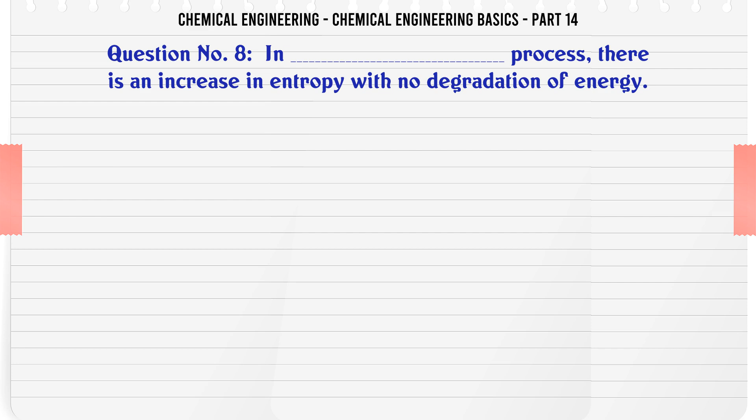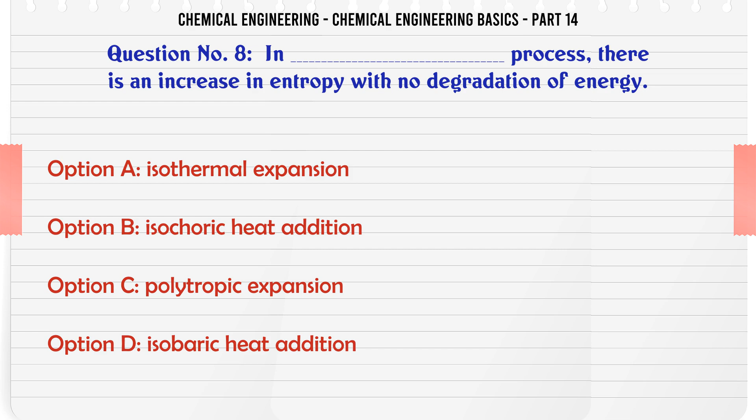In process there is an increase in entropy with no degradation of energy. A. isothermal expansion, B. isochoric heat addition, C. polytropic expansion, D. isobaric heat addition. The correct answer is isothermal expansion.

Which of the following is categorized as the plastic welding? A. gas welding, B. electric arc welding, C. forge welding, D. none of these. The correct answer is forge welding.

In spite of large heat transfer coefficients in boiling liquids, fins are used advantageously where the entire surface is exposed to boiling. A. film, B. nucleate, C. transition, D. all modes of. The correct answer is all modes of.

When water is sprayed on air passing through an insulated chamber maintained at a temperature higher than the dew point of entering air but lower than its dry bulb temperature, then the air is A. cooled and dehumidified, B. heated and humidified, C. cooled and humidified, D. heated and dehumidified. The correct answer is cooled and humidified.

The hardness of the lathe bed material is measured by the A. Shore scleroscope, B. Brinell hardness tester, C. Vickers hardness tester, D. Rockwell hardness tester. The correct answer is Shore scleroscope.

Radar is A. acronym for radio detection and ranging, B. name of technique for locating distant objects, C. name of instrument for locating distant objects, D. all ABC. The correct answer is all ABC.

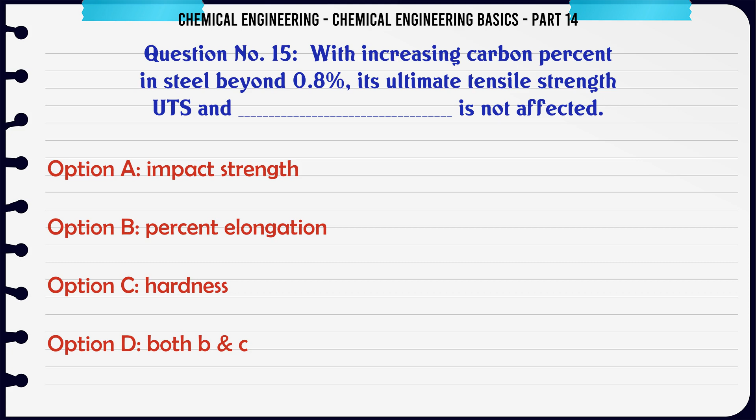With increasing carbon percent in steel beyond 0.8, its ultimate tensile strength is not affected. A. impact strength, B. percent elongation, C. hardness, D. both BC. The correct answer is impact strength.

Pick out the correct statement. A. A base is always soluble in water. B. Hydrogen is released whenever a metal reacts with an acid. C. Sodium hydroxide is both a base and an alkali. D. All indicators give red solution with an acid. The correct answer is sodium hydroxide is both a base and an alkali.

Aging of steel refers to the A. Degradation of steel by corrosion. B. Failure of steel structure by overstressing. C. Return of sharp yield point in temper rolled low carbon sheet after a period of time. D. Decarburisation of steel by overheating. The correct answer is return of sharp yield point in temper rolled low carbon sheet after a period of time.

When dry bulb temperature and wet bulb temperature of moist air is the same, it means that the A. Partial pressure of water vapor is less than the total pressure. B. Humidity is 100, dew point temperature of air has not reached. C. Dew point temperature of air has not reached, air is not saturated fully. D. Air is fully saturated. The correct answer is air is fully saturated.

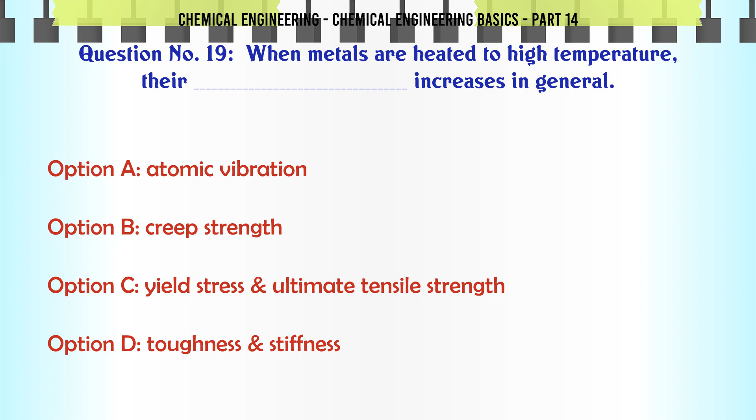When metals are heated to high temperature, their increases in general A. Atomic vibration. B. Creep strength. C. Yield stress, ultimate tensile strength. D. Toughness, stiffness. The correct answer is atomic vibration.

A friction lighter is normally used for lighting gas welding torch because of the reason that A. Its initial cost is very low. B. Duration of spark created is very small. C. Safety of welder is ensured. D. It is easier to operate and maintain. The correct answer is safety of welder is ensured.

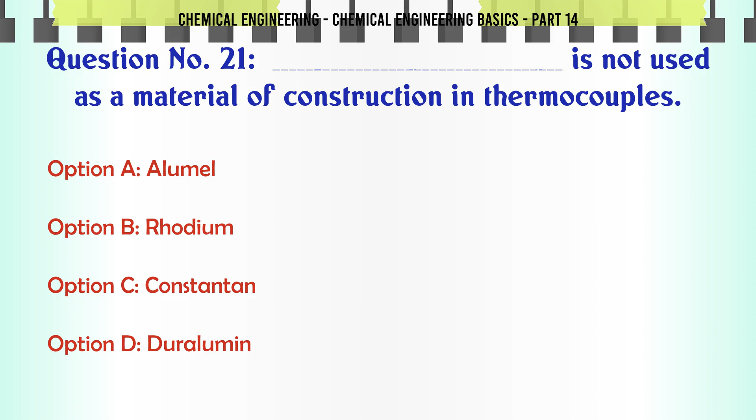Is not used as a material of construction in thermocouples. A. Alumel. B. Rhodium. C. Constantan. D. Duralumin. The correct answer is duralumin.

Coarse grained steels have A. Low toughness. B. No tendency to distort. C. High density. D. Very high toughness. The correct answer is no tendency to distort.

Steel balls are manufactured by cold heading. After cold forming, they are subjected to A. Tempering. B. Normalizing. C. Stress relieving. D. Artificial aging. The correct answer is stress relieving.

Free oxygen is removed from boiler feed water because it A. Reduces heat transfer coefficient. B. Is corrosive. C. Causes explosion. D. None of these. The correct answer is it is corrosive.

Out of the following, the material having maximum magnetic permeability is A. Silicon steel Si4. B. Cast iron. C. Wrought iron. D. Mild steel. The correct answer is silicon steel Si4.

A material being tested for endurance strength is subjected to the load A.

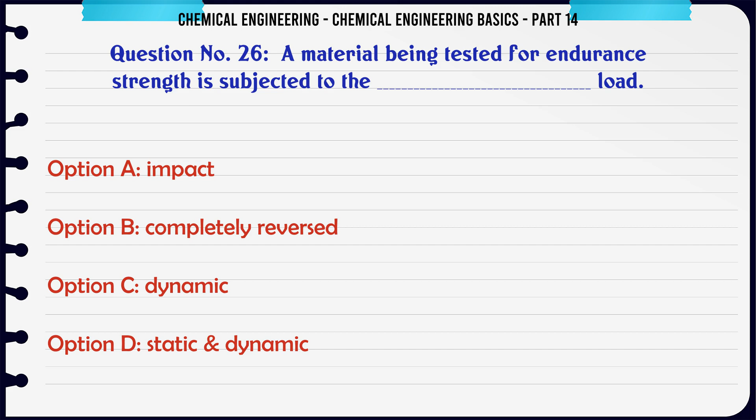A. Impact. B. Completely reversed. C. Dynamic. D. Static dynamic. The correct answer is completely reversed.

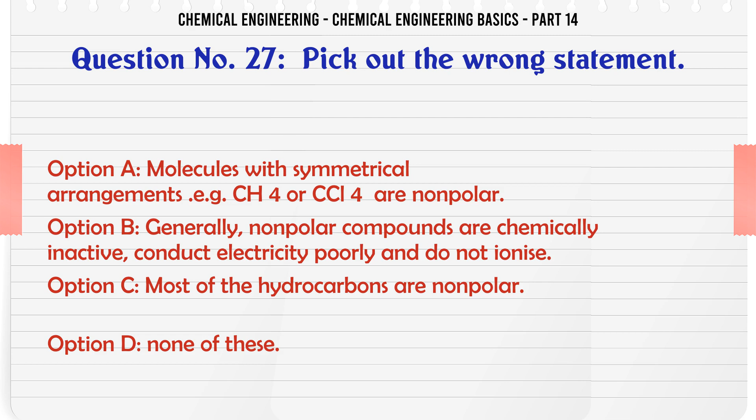Pick out the wrong statement. A. Molecules with symmetrical arrangements, e.g. CH4 or CCl4, are nonpolar. B. Generally nonpolar compounds are chemically inactive, conduct electricity poorly, and do not ionize. C. Most of the hydrocarbons are nonpolar. D. None of these. The correct answer is none of these.

All cycle handles are coated with nickel using A. Cementation. B. Spray coating. C. Galvanizing process. D. Tinning process. The correct answer is spray coating.

CANDU type nuclear reactor using natural uranium as fuel is the extensively used nuclear reactor because A. Specific fuel consumption is very low due to the use of heavy water. B. Fuel cost is much lower than that used in pressurized water or boiling water reactor. C. Heavy water is used both as coolant as well as moderator. D. Both B and C. The correct answer is both B and C.

Pick out the wrong conversion of absolute kinematic viscosities. A. 1 stoke = 1 centimeter squared per sec. B. 1 N dot sec per m2 = 10 poise. C. 1 stoke = 1 m2 per sec. D. 1 m2 per sec = 10^4 stokes. The correct answer is 1 stoke = 1 m2 per sec.

Unit molar solution of which is the best conductor of electricity. A. Sodium chloride. B. Acetic acid. C. Sulfuric acid. D. Sucrose. The correct answer is sulfuric acid.

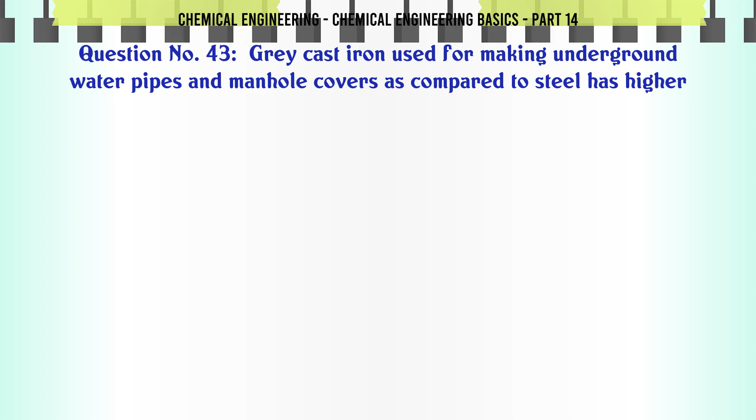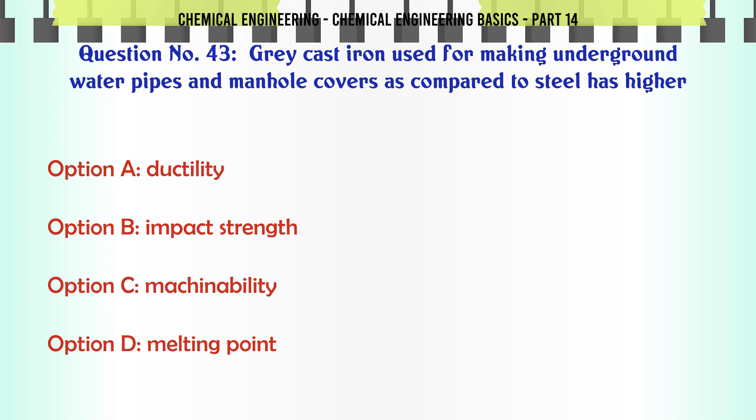Grey cast iron used for making underground water pipes and manhole covers, as compared to steel, has higher A. Ductility. B. Impact strength. C. Machinability. D. Melting point. The correct answer is machinability.

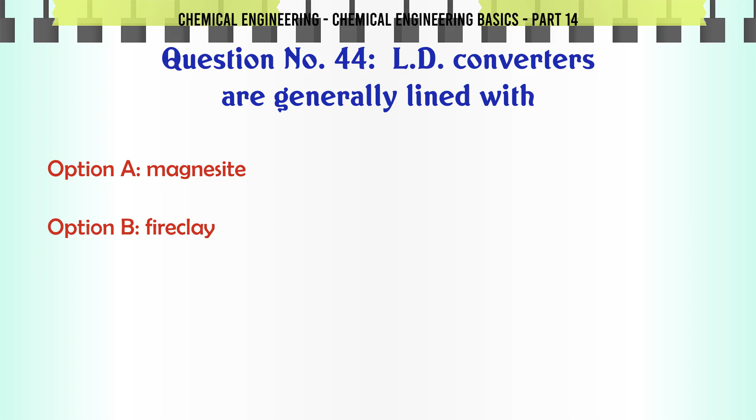LD converters are generally lined with A. Magnesite. B. Fire clay. C. Chrome magnesite. D. Silica. The correct answer is chrome magnesite.

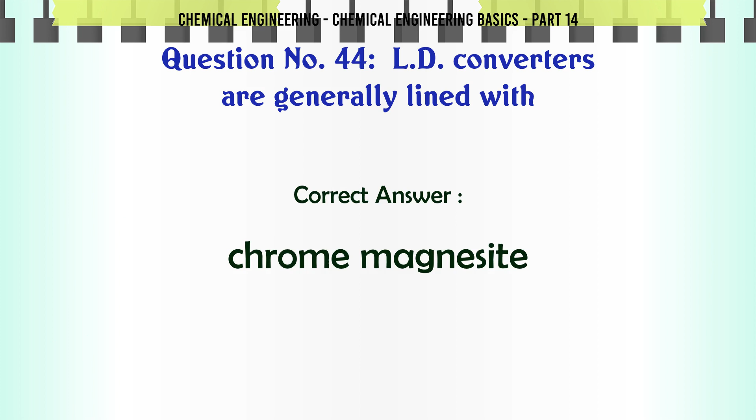When the weight of a ball inside the ball mill is just balanced by the centrifugal force, A. The ball abandons its circular path for a parabolic path. B. The ball abandons its parabolic path for a circular path. C. The ball continues to move on a circular path. D. The ball continues to move on a parabolic path. The correct answer is the ball abandons its circular path for a parabolic path.

Which is not a heat treatment process? A. Cyaniding. B. Parkerizing. C. Austempering. D. Martempering. The correct answer is parkerizing.

An ingot is hot forged to a 60% reduction in cross-section area. The percentage reduction in the volume for the above process is A. 0. B. 60. C. 30. D. 20. The correct answer is 0.

Volute casing of a centrifugal pump does not facilitate A. Uniform flow of fluid coming out of the impeller. B. Increase in the pump efficiency. C. Conversion of the part of the velocity head to the pressure head. D. Conversion of the part of the pressure head to velocity head. The correct answer is conversion of the part of the pressure head to velocity head.